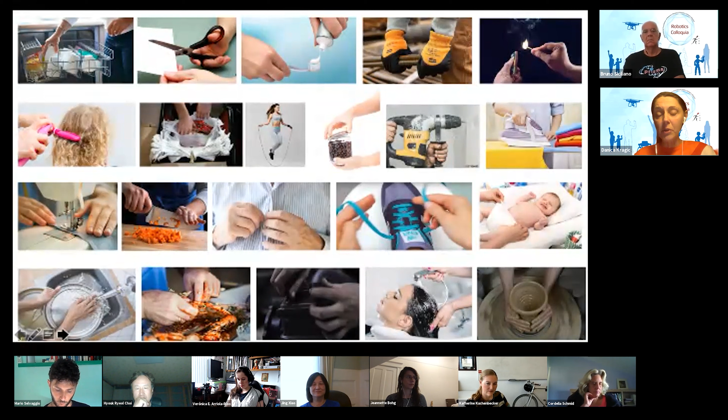We still don't have a good way of solving either the perceptual problems, the control problems, or the planning problems. I think images like this can serve as inspiration for very many different communities, not only robotics, for quite some time ahead. Now, when it comes to interaction tasks, I would say that the majority of human manipulation tasks are contact rich.

We get into contact with things, we lose contact, we actually use contact to exert compliant motion and so on. What is important when it comes to contact-free or contact-rich manipulations is that in the first case we potentially do not have any exchange of forces or energy, while in the second case we do.

When it comes to contact-free manipulation, we can probably do pretty direct kinematic planning, while contact-rich tasks do require dynamics to be taken appropriately into account. When it comes to the methodologies we use and develop for addressing these, they don't come only from the robotics community, but also from control communities, signal processing communities, machine learning, computer vision, and so on.

What I will focus on a little bit more today is why this is relevant for feedback control, and how data-driven methodologies that have been very much employed during the past decade, also in the robotics community, are potentially useful to solve some of the difficult problems of which examples I have shown on the previous slide.

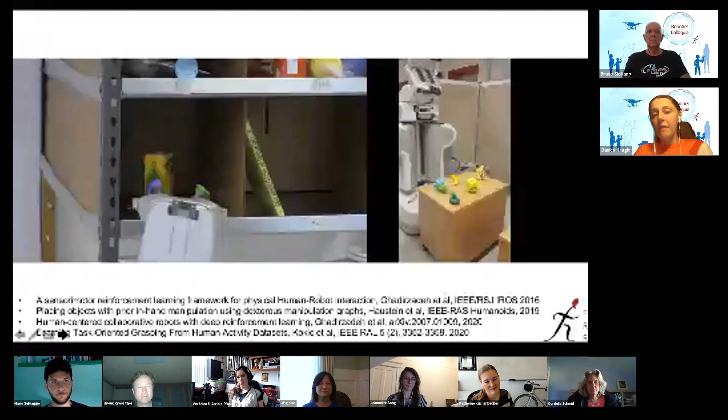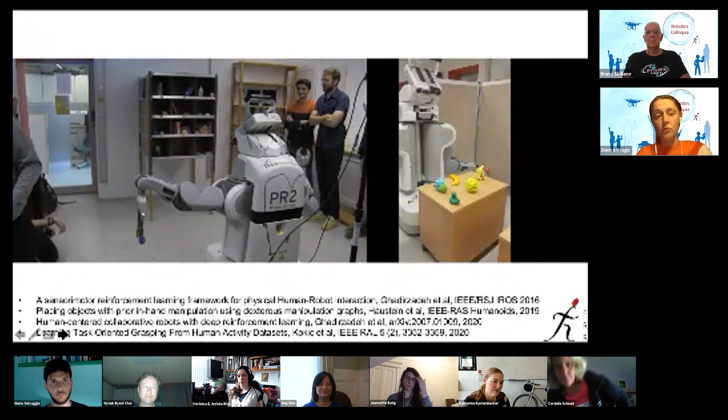Just to give a couple of examples, why do I show videos here? This is one example from the first Amazon picking challenge. Everything we do, we want to have a nice underlying theory with all the proofs needed for our controllers. We want perceptual algorithms that generalize and so on, but they also need to be effective. We need to be able to effectively execute tasks.

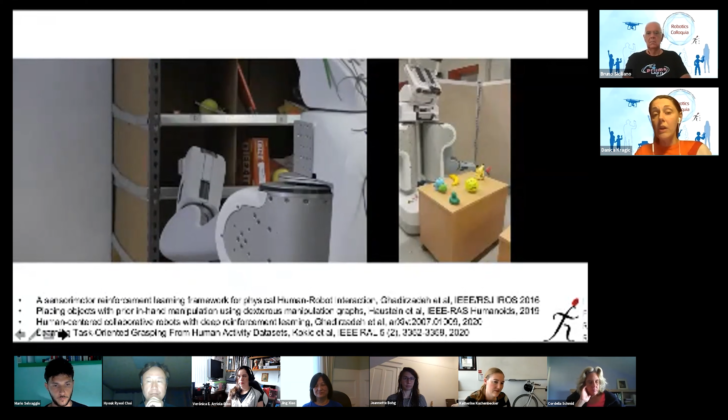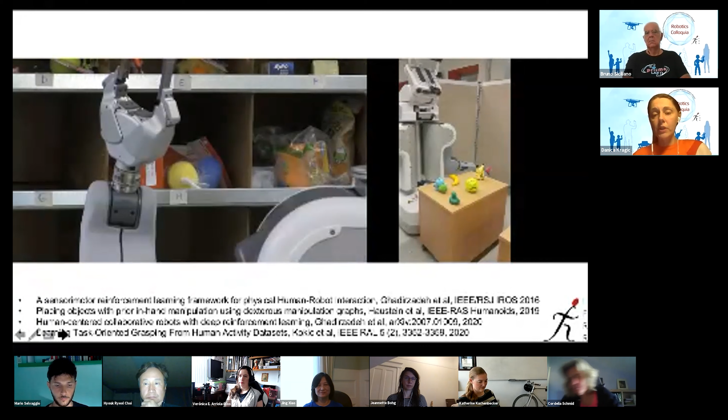Robots need to do this as fast as possible. They need to be able to adapt to changing environments, and if there are errors, they need to be able to replan their actions when errors are detected, so as to resolve them. The techniques we use rely on the integration of the strategies or approaches I presented on the previous slide.

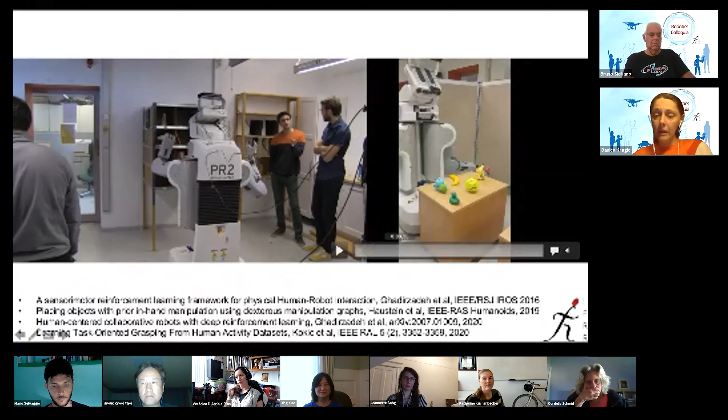Some of the tasks we would like robots to do might be too difficult to model analytically. So in order to understand how to throw a ball at an object here, which happens to be a Pokemon, this is a couple of years old work, we need to really understand the hand-eye coordination, the dynamics of throwing and so on. Having an analytic model for that may just not be feasible to design.

So machine learning strategies and ways of representational learning can be very effective when there is high complexity in the tasks we want to address.

Now I have been speaking a bit about multimodality, and I want to visualize it with one more example. When it comes to the robotics community and applications of robotics technologies for the future, there is a lot of promise in human-robot collaboration. Partially for the purpose of robots learning from humans, or robots even teaching humans how to do things, doing things together, leaving humans to do what they're good at, and then supporting, as a third hand, human activity in natural environments.

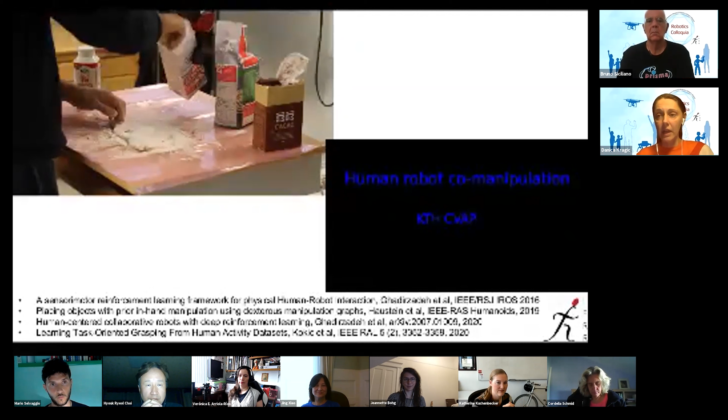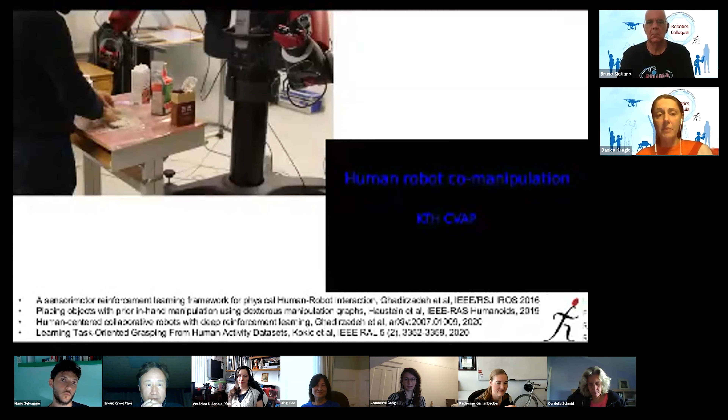In this particular case, observing a human baking is not all that easy. We still don't have good models of representing the state of something such as dough that changes a lot. And even relying on vision-based methods for hand tracking in cases where the hands are covered with flour or with this very deformable object is still very difficult to achieve.

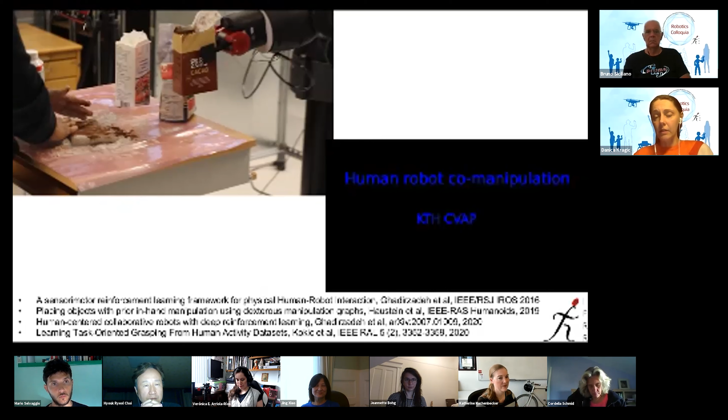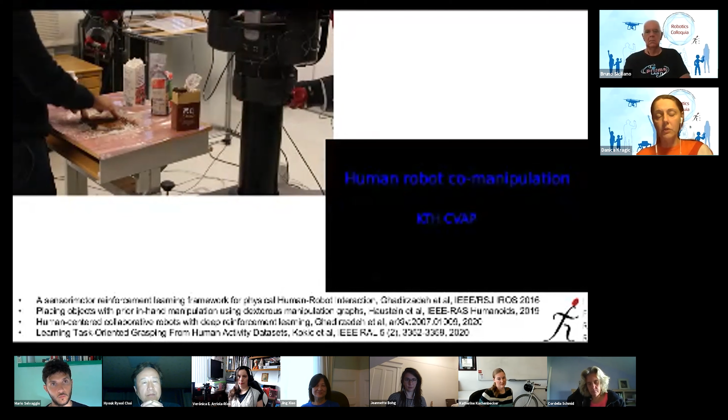Beyond just observing visually and passively helping, the robot wants to also engage in interaction with the human. So having a dialogue, explaining what the human is doing, what kind of help is needed, is something that would be needed in a scenario like this.

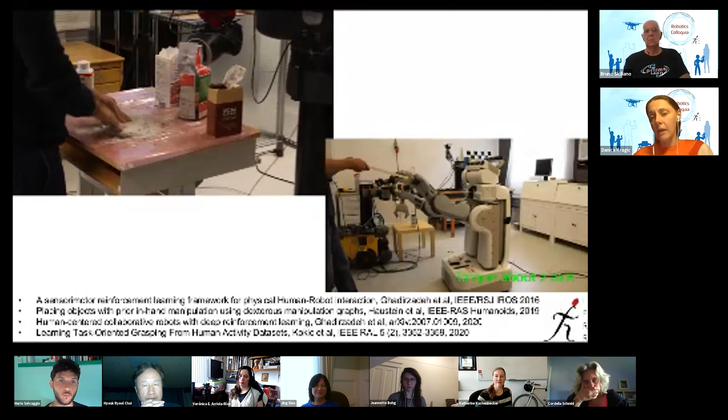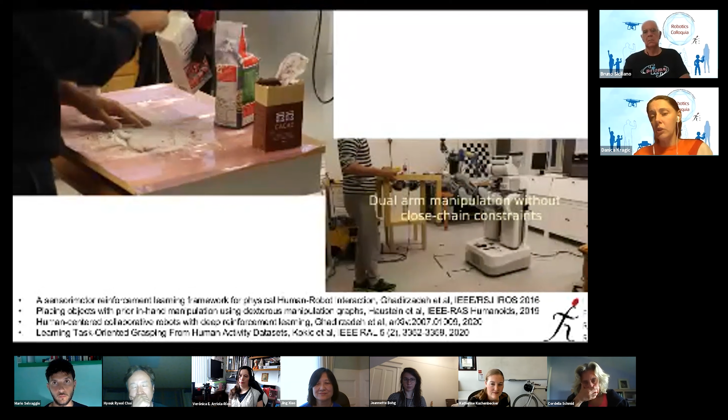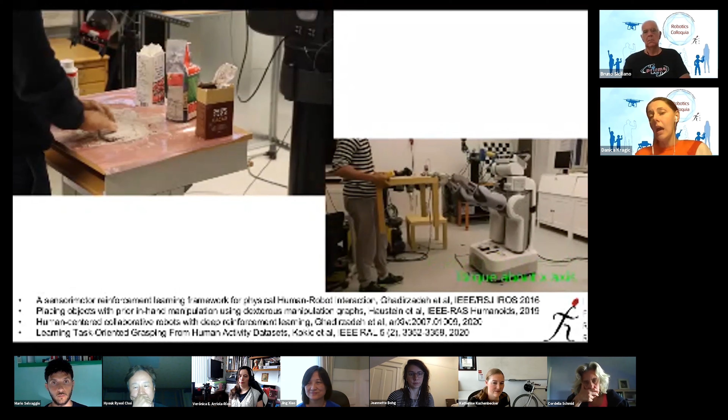Now, there are other types of collaborative tasks that are maybe more kinematic in nature, such as humans getting help from robots in carrying things around. For this to be done efficiently, the robot needs to understand something about the human body and its movement. It also needs to understand its own body, whether a certain activity brings the arms close to singularity, and address that properly without scaring the human with jerky motions.

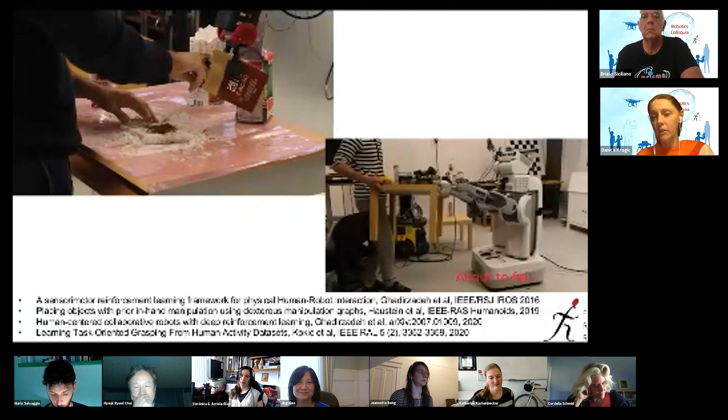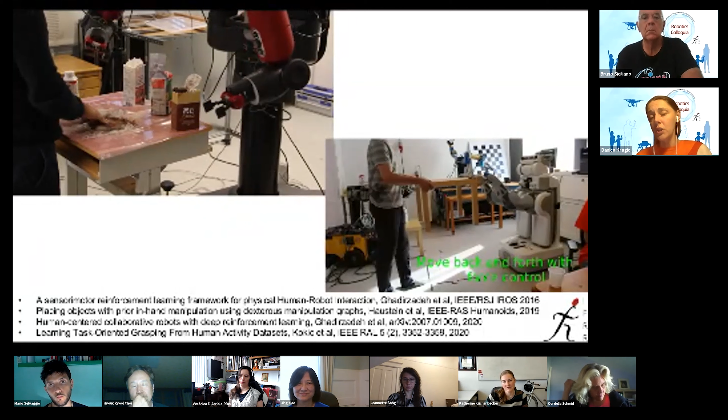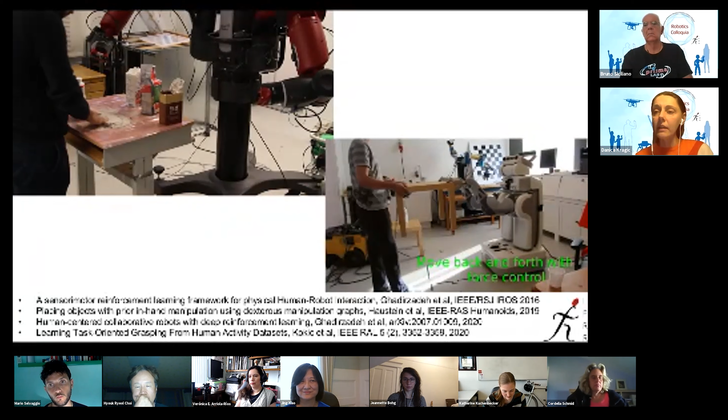I don't believe it's easy to solve these tasks only by relying on a single sensory stream. I think most of these tasks are extremely difficult to solve without also using conversation or dialogue. The robot, especially with an untrained user, will need to explain to the human what it is about to do, why it moves in a certain way, and somehow signal its planned behavior so the human doesn't get scared or generate some jerky motion that results in strange behavior from the robot.

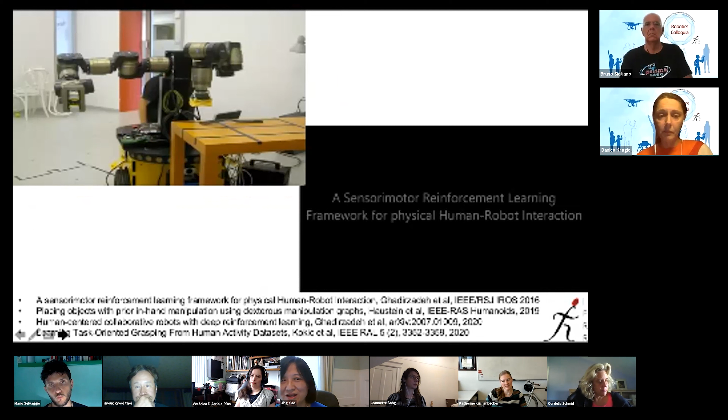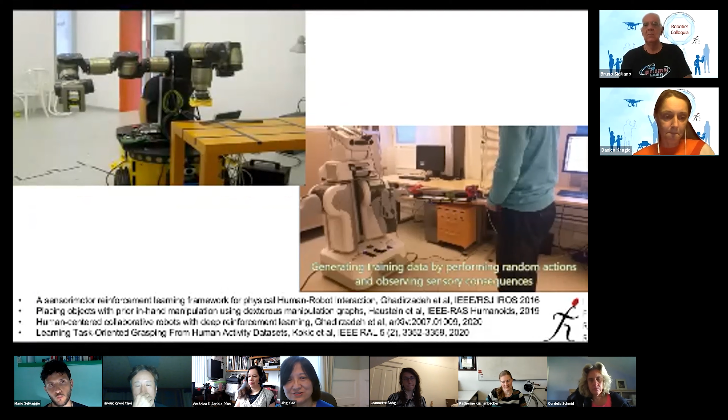Oh, hello, Danica. I'd just like to know a little bit more detail about this interaction. It's very interesting. How does the robot know what the person will need, what ingredients, and what kind of gesture or signal the person gives the robot?

It's not too obvious. Do you mean in the second example with the human-robot co-manipulation? I'm actually talking about this baking example. It looks very interesting.

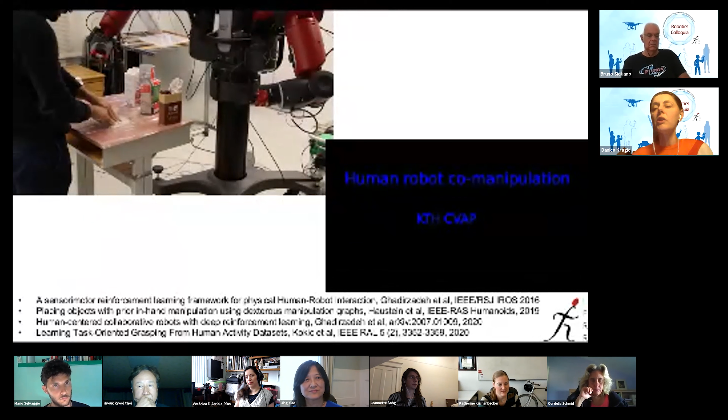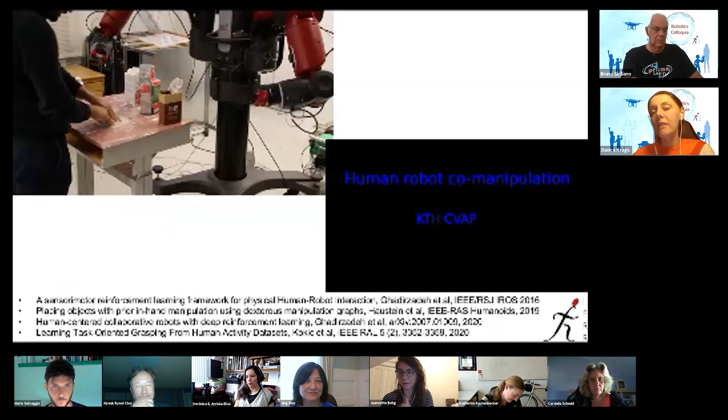This was just more from the purpose of motivating the problem. What we are looking into is a rather simple dialogue-based interaction, where the human follows a recipe. They have a task from a recipe, and the human starts with a set of activities or actions related to the ingredients in the recipe, and then asks, for example, okay, now I need sugar, now I need this, and so on. The robot can use that information to identify the right ingredient and give it to the human.

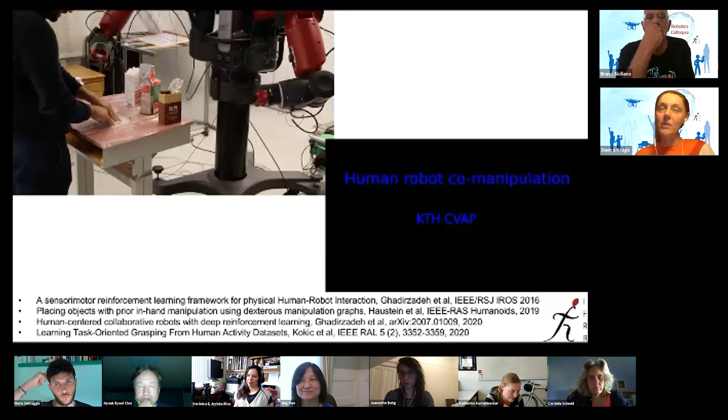This is just a motivating example, because the technical issue is how does the robot understand how to actually shake the box with sugar and shake the box with cocoa in order to provide the right amount of the ingredient. We thought, okay, it should have a small spoon and take things out and then measure, but it's too difficult. So the issue of shaking and getting the right relation between how much powder comes out and the shaking is an interesting dynamic problem in itself.

Very interesting manipulation, actually. Yeah. So thank you.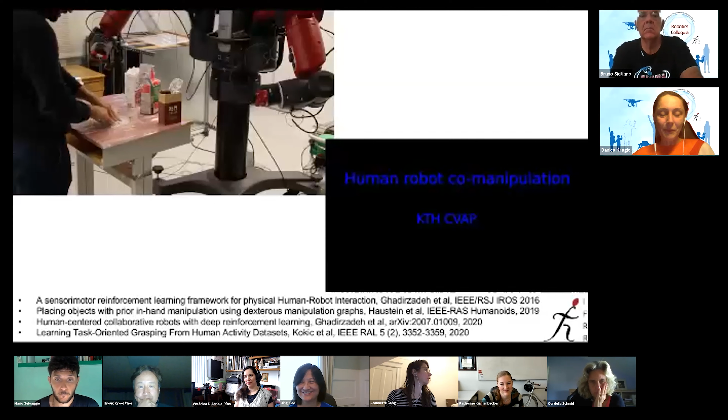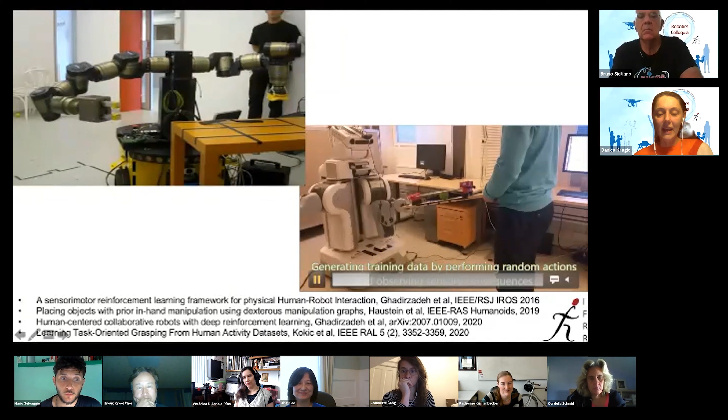Now, there are a couple of other things that I find interesting. The whole grasping area has been, not negatively perceived, but potentially considered as a resolved problem. I don't think that's actually the case, because when we interact with the environment, we don't just grasp things, we actually plan how to grasp them, and that plan is very much dependent on what the robot is supposed to do with the object.

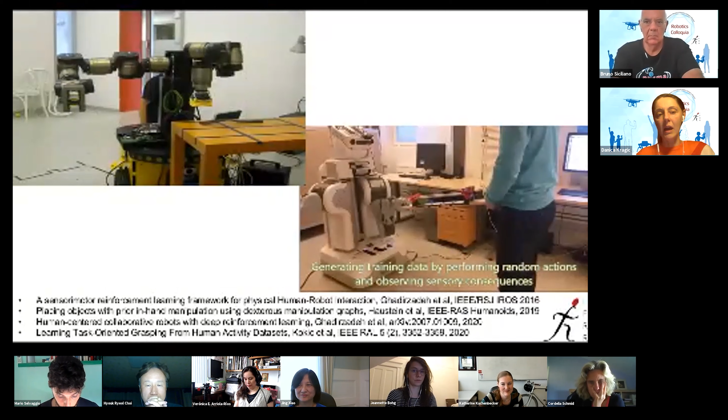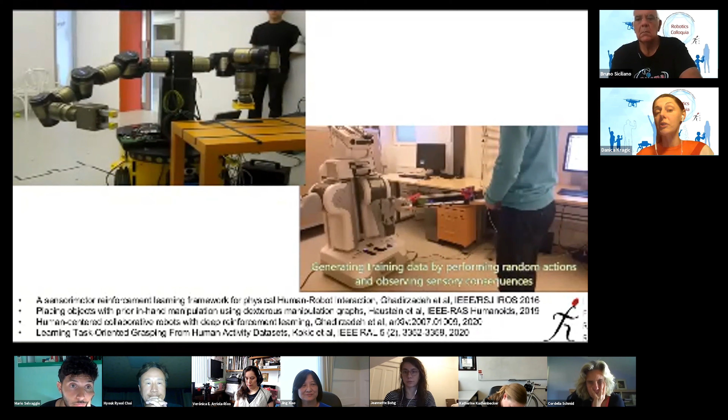So here I'm demonstrating, this is like a 10 year old video. We address the problem of pre-manipulation: how would the robot first plan how to reorient the object so as to be able to grasp something from a surface that is very flat. I think this type of planning is something humans do almost without mental effort, but we still don't have good credible strategies for all types of objects and tasks where robots can engage in that pre-manipulation effectively.

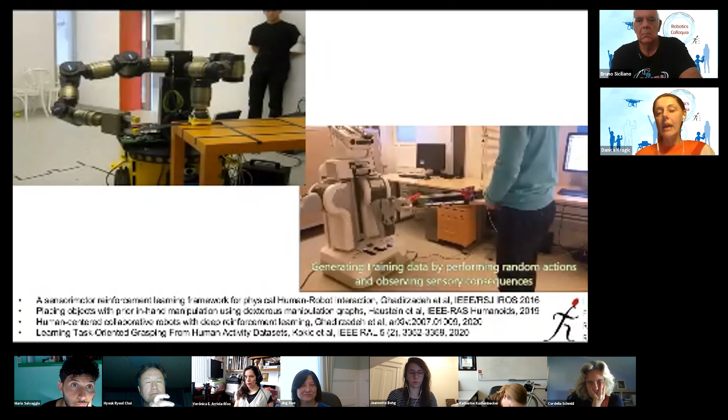And then finally, also looking into more human-robot collaboration, direct physical interaction, we looked very much into co-adaptation. This was a result of one of the EU projects we were engaged in. It looked into how much time one would need for the robot and the human to entrain themselves.

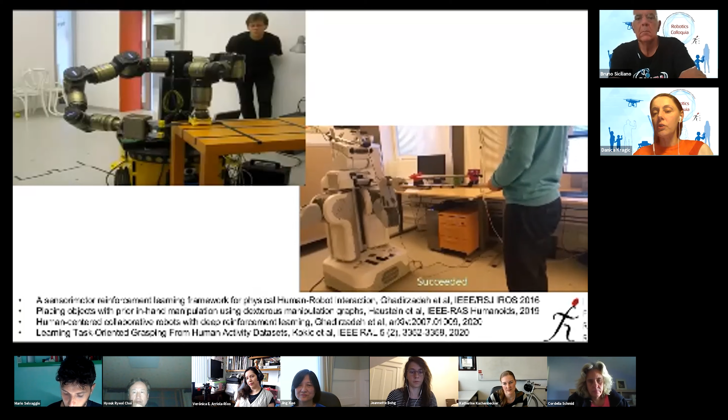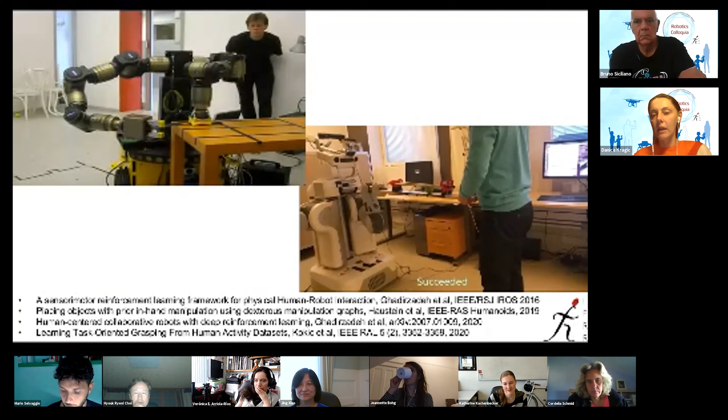So the task here is to move the ball, to have it at the end of the movement at the middle of the board. So the idea is that the robot and the human collaborate in order to achieve that task. They know what the goal is, but now they need to adapt the velocity and the movement to achieve that.

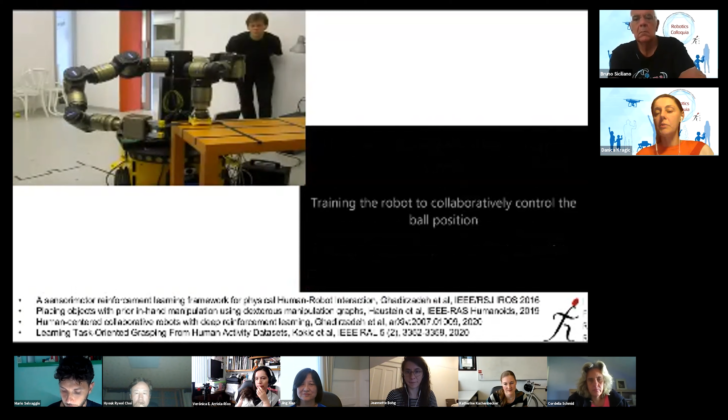I think that's also an interesting example, which we have many of, different types, where it's not only the human that acts as a master and defines what is to be done, but the robot needs to collaboratively also provide its own contribution, based on its own capability, it needs to commit to achieve a certain type of task.

Now I want to say a few words on hardware, because in most of these videos you have seen, well, not all of the platforms, but many of the platforms or generations of platforms that I have gone through. I have always tried to engage or use dual arm platforms, because I think that offers us more ability to address a large variety of tasks, and also platforms that are mobile. And Bruno has mentioned, yeah.

I will come to that when I give examples of chopping, hacking, or cutting tasks, because I think that's exactly what... thank you Darius, long time not seeing, I miss you. It's an excellent question, I think.

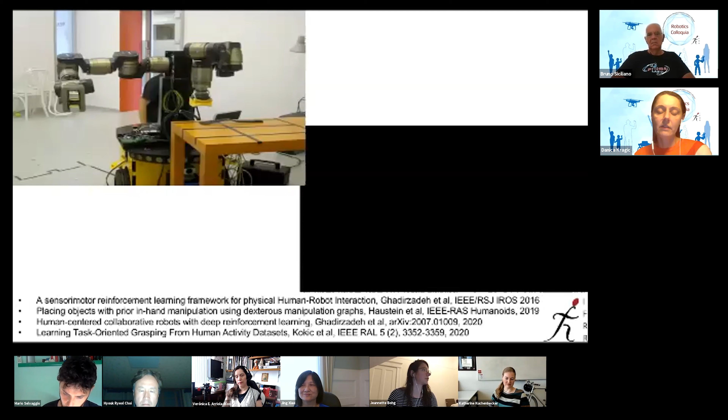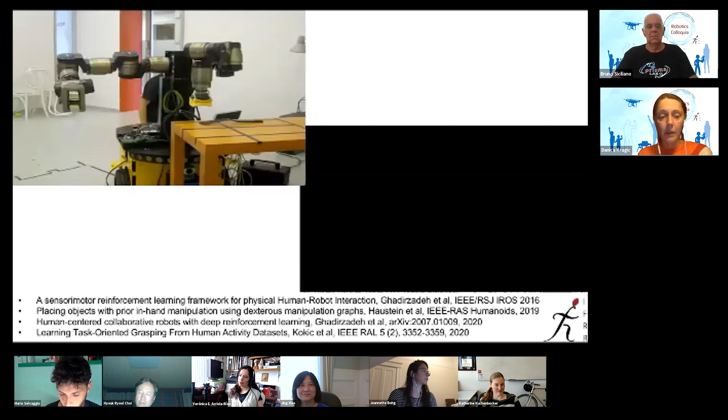Now, why am I mentioning this? 60 years, is it a long time? I don't know, so I'll try to make a joke and maybe nobody will laugh. But 60 years of Formula One.

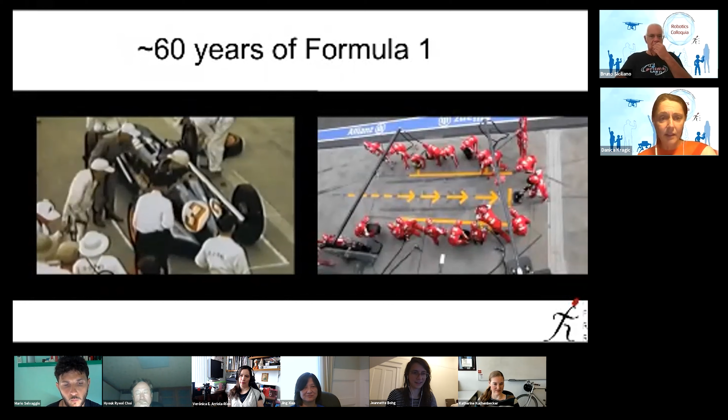1960s, last century. So this is an example of how it looked for a driver to go to a pit stop. You see there are a couple of gentlemen around, one of them doing some really heavy work there in the background, exchanging the wheel and so on. And yeah, it does take some time. The guy has also the time to get some coffee and so on.

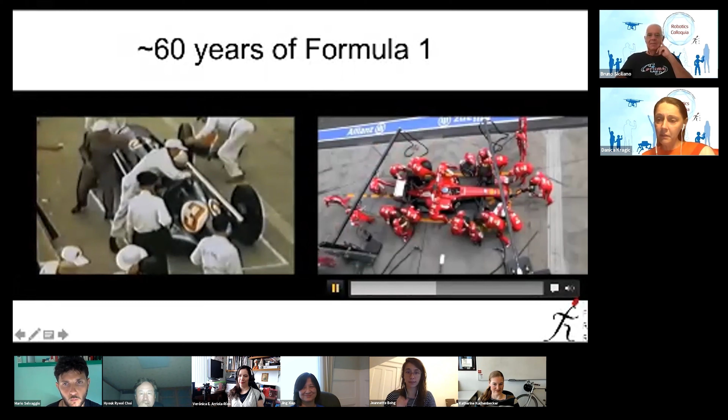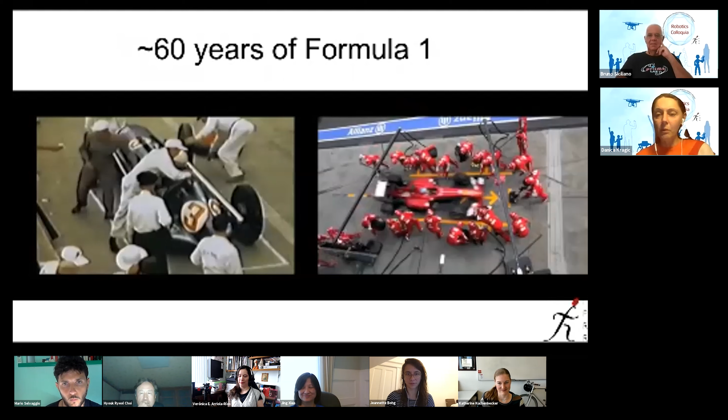And then look at us, how it looks nowadays. The car gets in and the car gets out and the job is done, right? So I feel that this is a little bit what happened to robotics, you know. We deal with good old problems. There is a little bit more people involved. Things happen a little bit faster. But not much has changed.

I'm not going to comment on the gender issue in this particular area here, but I think that it just shows that there are problems that in the beginnings of robotics, or even now, I think that we are underestimating both the effort that needs to be made, and also how that effort should be made in a more collective, more collaborative manner when it comes to researchers. Now, why is that?

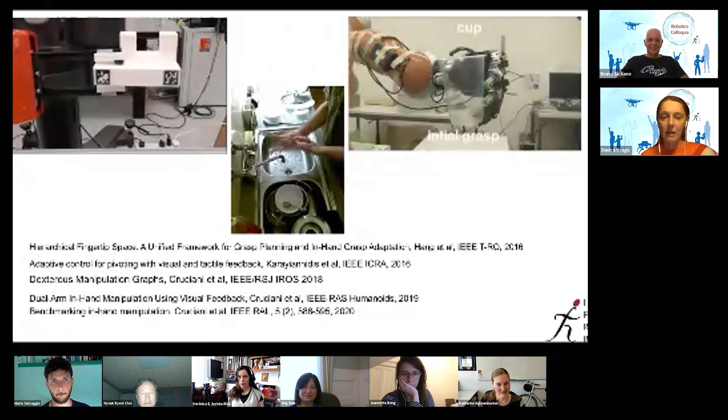I've been using this video, and I'm going to continue to do this for hopefully the next 10 years too. I'm not saying that I would like to have a robot that does this. Dishwashing, we have dishwashers, although my husband says that this is a task he cannot do. But anyway, I think it's a fantastic example of where grasping, interaction, dual arm manipulation comes into play.

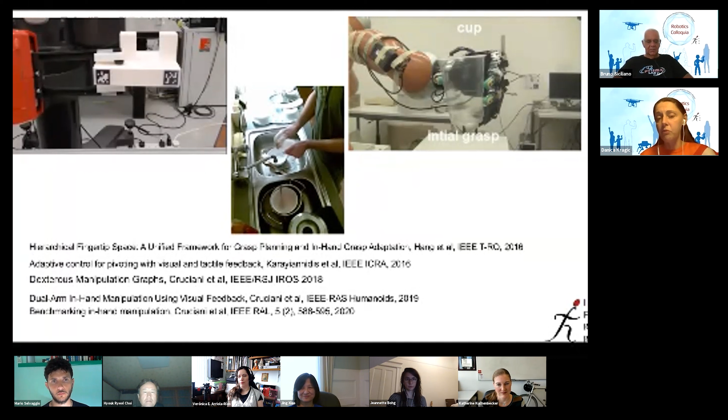So the human here uses hands as a tool. It manipulates another tool, this sponge, right? He is able to adapt the forces and the torques to the friction conditions that also change, right? If we have oil on porcelain or on metal or on plastic.

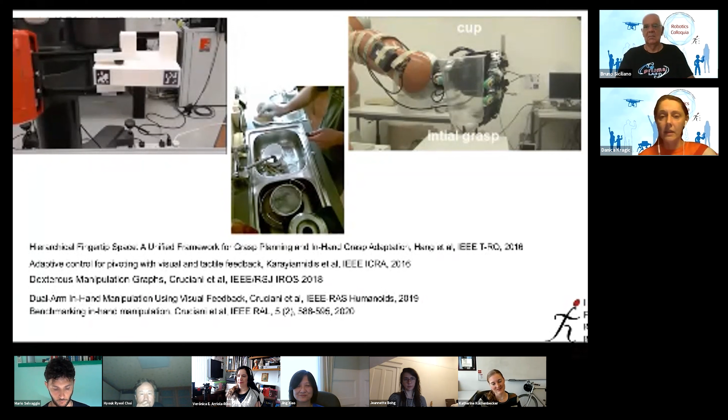And of course, I talked a little bit about this emotional aspect in interaction tasks. If you have something that is pretty expensive in your hand, like a very expensive porcelain bowl, you will probably not put it in the dishwasher. You will wash it by hand, and you will do it very carefully. So this, or if you have a dangerous object in your hand and so on.

So all this knowledge here is something that is somehow trained, or innate to humans. Well, not maybe innate, but definitely trained. That is still very difficult for robots to do, especially when it comes to interaction in different media, which also most of the robots won't be able to do in water, oil, and so on.

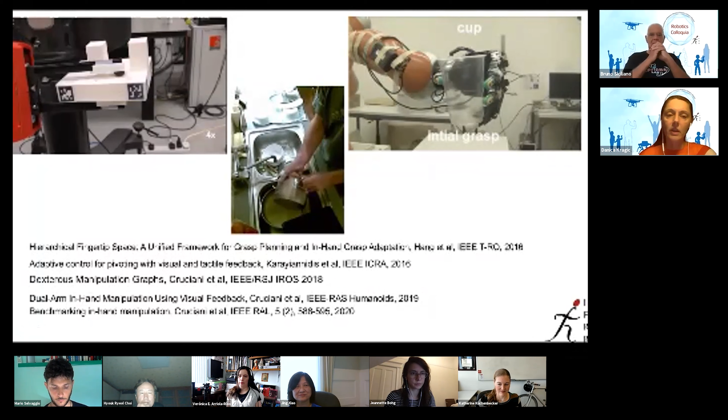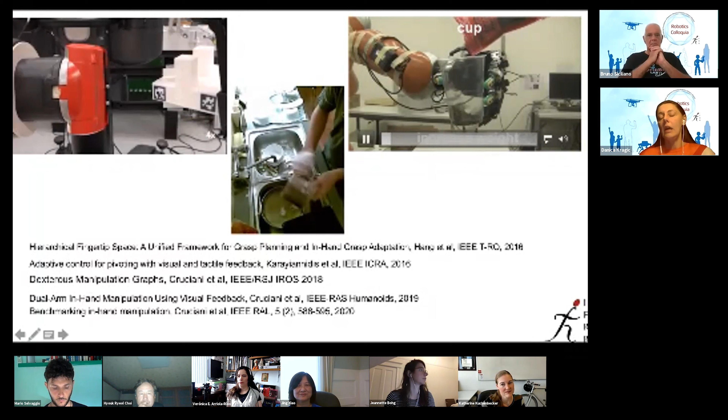Now, what can we do when it comes to in-hand manipulation? Yeah, there have been examples of actually moving, reorienting objects, and also work that can adapt to both changing properties of the object and external forces, doing regrasping, squeezing harder, addressing the issue of pivoting or regrasping.

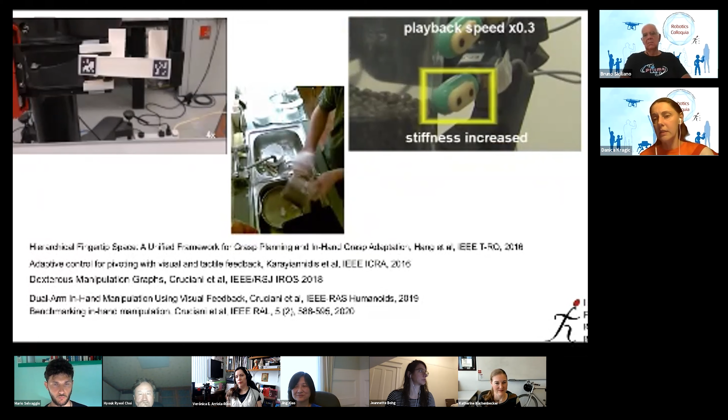I think that all of that is interesting, but as most of you know, especially those working on grasping, this requires quite some time to set up the system, to get the necessary, in this case, tactile feedback to understand how much force I can actually exert on this object until it breaks.

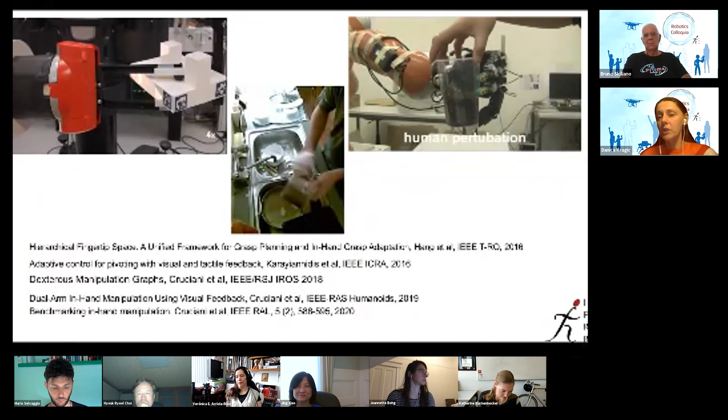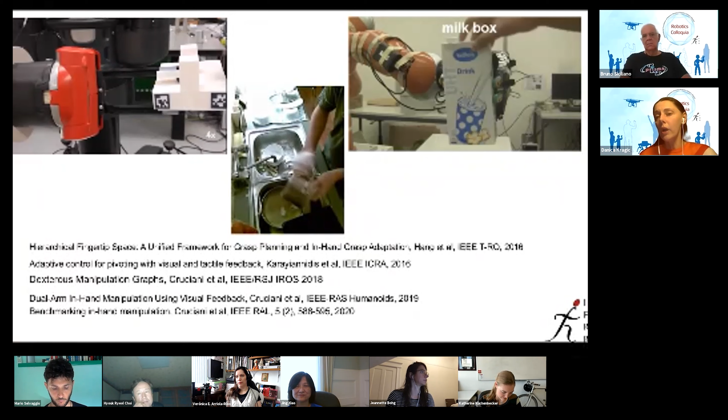And where just exerting more force is not enough, but that actually I need to grasp it in a different way in order not to lose the object from the hand. Or if the external forces or the weight is too high, I would also need a second arm or a second hand to act as a support.

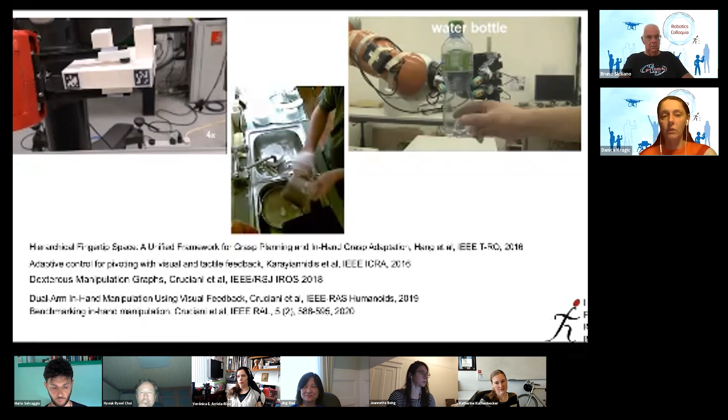And all of those interesting problems, I think we still need to find a good way of how to solve and generalize over different platforms and over different types of objects.

Now, that's why I think that all of the problems that we see, maybe as grasping, caging, in-hand manipulation, and so on, they need to be put into context of an integrated system.

So we need to understand how to actually pre-grasp something in order to be able to maximize the way of re-grasping or caging the object once the external forces start to act on that. And once it has been grasped, also have the ability to then do online control. It goes a little bit into the direction of what Darius has asked.

Many of the properties of the objects will not be known, maybe prior to actually doing post-grasping. We will need to understand something about the friction, weight, and so on. So that needs to be estimated, and reused, let's say, in the control strategies.

If we don't have the appropriate sensing, so if our tactile sensors cannot sense shear forces, it is of course necessary to use other types of sensors, such as vision, in order to understand whether slippage has occurred, and be able to have systems that choose the appropriate feedback to fulfill a task or just keep the object stable in the hand.

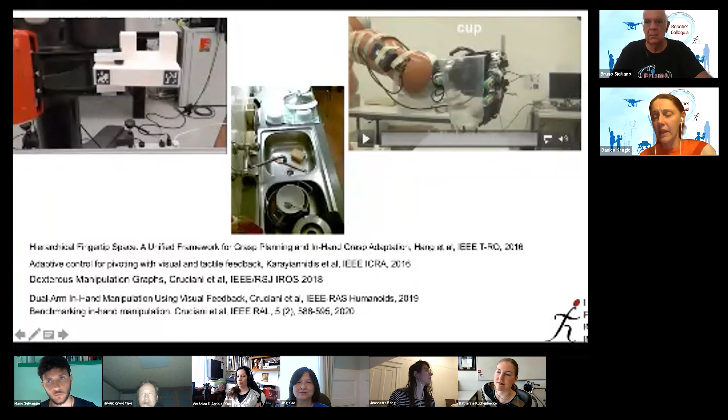No, so everything is with feedback. In this particular example, the work we did with Aude Billard's group, which is on in-hand adaptation, used the SynTouch sensors to actually measure the forces and also the vibrations, and uses that to basically do stiffness-based control. We also use a force-torque sensor in the wrist to understand the external forces acting on the cup. In this particular case, fiducial marks are here, but we are actually using visual feedback to understand the pose of the object in the hand in order to be able to plan the reorientation. So in these examples, everything is based on single or multiple sensory feedback.

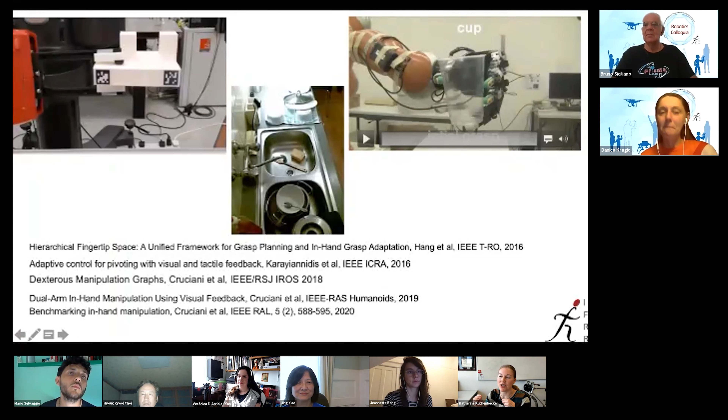Dani, great, can I ask a follow-up question? This is Katherine. Let's go to the picture on the right here. I liked the contrast you were making between the SynTouch BioTac, these biomimetic fingertip sensors, and the force-torque sensor. I find that my students, the force-torque sensor makes a lot more sense to them — they know the units, you can draw a vector, you can really make sense of it. The BioTac signals, even though you said it's not a force sensor, it's impedances through the fluid, these tactile sensors, it's complex. What's your opinion? Do we need both of these kinds of sensors? Does it really matter if the sensors are interpretable from an engineering standpoint? Do we need multiple modalities?

I'm kind of of a belief that we should try everything and then have good ways of assessing how relevant it is for various types of tasks. When it comes to slippage, for example, I think it's extremely difficult to detect with solely a force-torque sensor, or when you do things and interact — for example, we have a couple of examples of using tools, mixing things in a bowl or something like that. For tasks like that, a force-torque sensor might be okay, but everything that has to do with reorienting things in the hand, or potentially applying forces actively, like in this particular case where we squeeze and look into the stiffness to understand how much — there's an upper bound of how much we want to squeeze in order not to destroy this plastic mug — for all of those things, I think we need the fingertip sensing.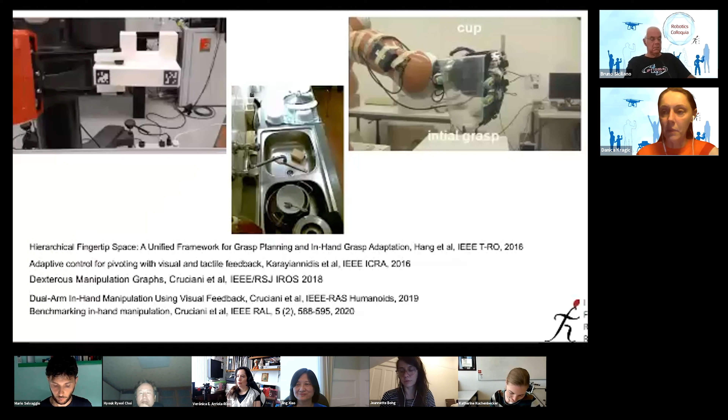Now, from the machine learning point of view, I think it would be interesting to look into disentanglement as a scientific problem—to understand, out of all these measurements, are these representative for the task? How are they representative? Can I use them as generators for control and so on? I think we should encourage everybody to use as many sensors as possible, but really try to choose something the whole community can use robustly, so we don't have all these tedious processes of calibration. Thanks.

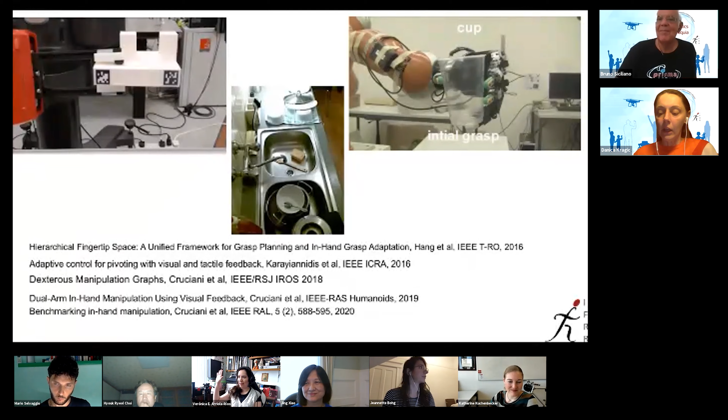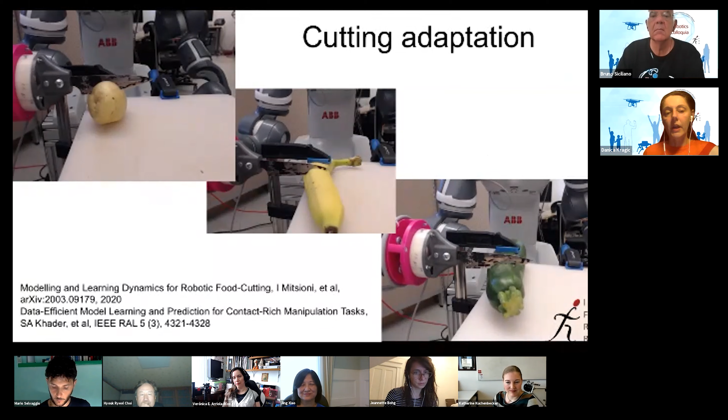Okay, I'll continue, but please stop me anytime. Some of the recent stuff we tried is adaptation in cutting. I wanted to go back to what Darius asked—and this is extremely difficult. It's not only that model predictive control or open loop strategies don't work because not all potatoes are the same, not all bananas are the same, not all squashes or zucchini are the same. It's not only that—the potato is actually not uniform in terms of stiffness or hardness along its whole body, if I can say that. So these are some representative tasks that are extremely difficult to do.

Now, again, you see another robot we are now using for this type of task—it's ABB Yumi. For this purpose, in order to exert forces needed to cut really hard stuff, such as potatoes that have lots of sugar, which makes the knife stop moving, or carrots, the robot couldn't actually exert the forces we needed. So I think this is also an interesting problem that one needs to address.

Maybe the robots won't cut in the same way as humans. Maybe we need to choose different types of cutting strategies, so the second hand is not just steady holding the object, but rolling the object while the hand is cutting. So there are many interesting things still to address here, and that goes a little into the direction of what you, Katherine, have just said—it's not so much about doing things the same way as humans do, but trying to understand what are the plausible strategies we can actually have on robots.

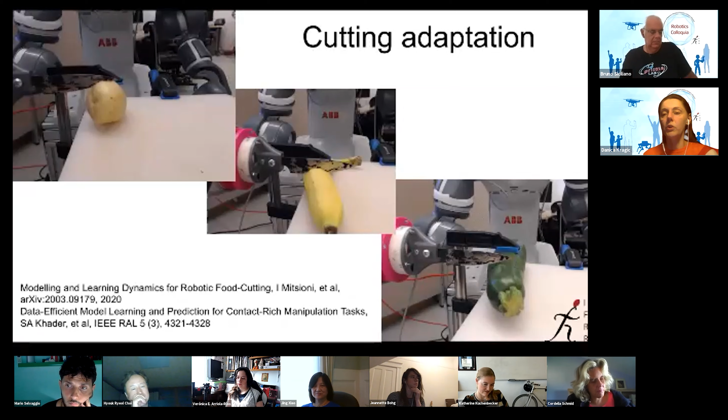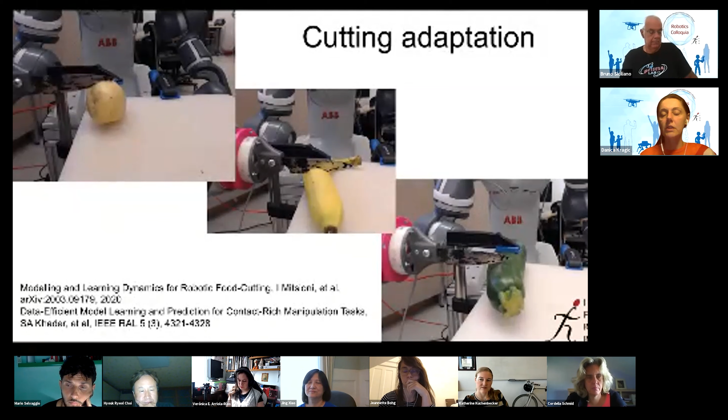If you think about fruits that have hard parts inside, that changes things. So one can be very creative about the structure you try to cut through, and look into how you can adapt your controllers, maybe learned on a similar type of object, while you're cutting. It's not so much about the task - we really want to understand how the physical properties affect the choice of models we are using. Hopefully that addresses it; I'll come back to this when I talk about interpretability later on.

I think this also goes a little into the direction of what Jeannette just asked. Yes, we need to think of problems that are task relevant but also generalize over various types of tasks, because we cannot assume the robot will always have the experience of having interacted with exactly the same type of object, fruit of the same size, and so on before.

We also want to do these things embodiment independent. So again, in the direction of Jeannette, if I learn how to do this on a velocity-driven robot, we should be able to transfer that to a torque-controlled robot or vice versa. We should be able to do this between Yumi, Baxter, PR2, Franka, and other robots. So what I'm looking at is how we can build embodiment independent controllers that are able to do that.

In the direction of Cordelia's question, it would be nice to show that a robot that has force torque sensors, tactile sensors, and visual sensors can deploy all this data, but has such a representation that it knows which measurements to use when. It should identify where it is in the process and use the right type of measurements to resolve the problem or execute the task. This has a bit to do with disentanglement, but we need to really understand the physical properties of things to be able to do that.

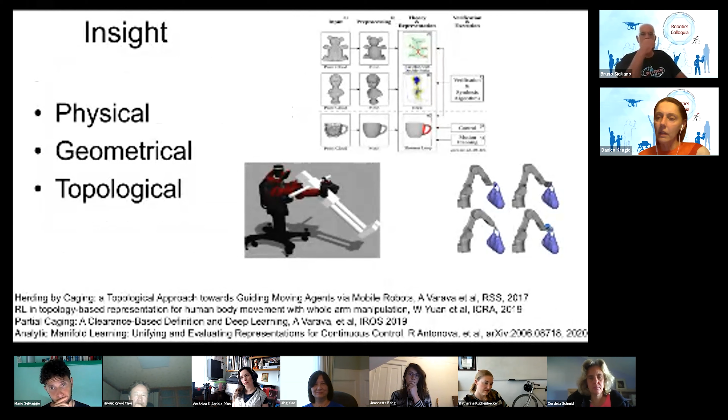When it comes to the properties that everybody has mentioned, these are some physical or geometrical properties of the objects, but there are also representations that can be topological in nature, and these can be very much relevant for different tasks. So grasping things or caging things, it can be about hooking things, helping humans come out of the water. It's not really about grasping, it might be more about caging, making sure we have the interaction or linkage between structures.

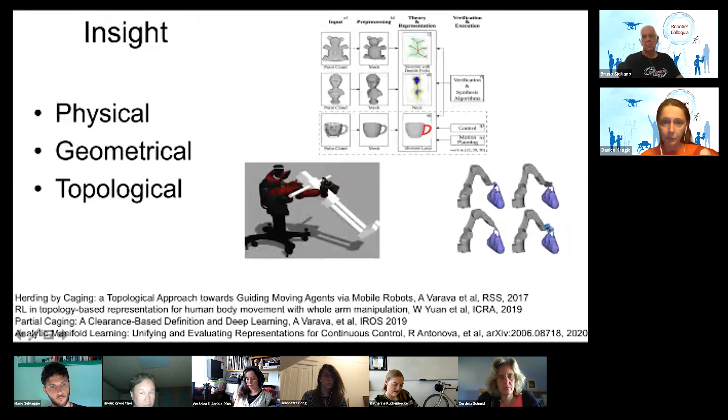These are some of the problems we looked into, how that can be used for controlling full body motion of not really a humanoid robot, but a full body robot, and also for interactions with objects that have loops, for example. I wanted to show a couple of examples where the geometry plays a role.

This is now 7-8-year-old work where we tried to look into geometrical representation of grasps and shapes. Are there parametric representations that allow us to have a space of grasps and shapes in which we can transfer stable grasps? If I know how to grasp a book with a 3-fingered grasp, you see the normals here, that's one stable grasp that can be applied.

How can I, by having a relevant continuous representation, move in this representation space as the shape changes in some parametric way, and the 3 stable grasps with 3 fingers remain? I think this is very interesting.

Of course it opens for development in many different ways. It's not taking into account the embodiment, whether these 3 grasps can be achieved by any of the available hands, but this is something we could address now with more data-driven methods, trying to look into how the kinematics of a hand should look in order to continuously grasp this set of shapes.

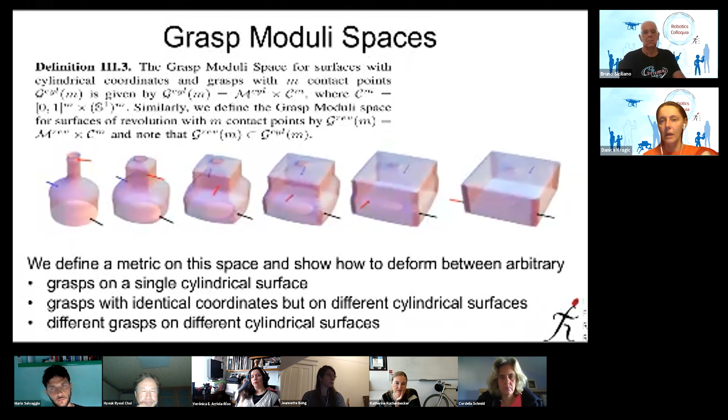I know I'm out of time, but I want to say a little bit about revisiting task-based grasping with CNNs and Bayesian optimization. We did that recently to understand how to actually learn task-based grasping from very few trials. We also look into how we can use various types of priors and regularizers to understand tasks such as pushing.

For example, in this case, again with Yumi, we change the friction on which the box is pushed, and we change the friction of the box. We tape various types of materials on one side, and the robot needs to adapt how to push something where the friction condition changes without tipping the box. It needs to identify that conditions have changed and, in a more reinforcement learning-like framework, adapt the way it pushes in order to do the pushing again without tipping.

Let me skip that. One more way of thinking of efficient representation is by using a cascaded network of encoders and decoders. Here we wanted to learn pretty dynamic tasks of throwing and some picking and grasping in very few trials.

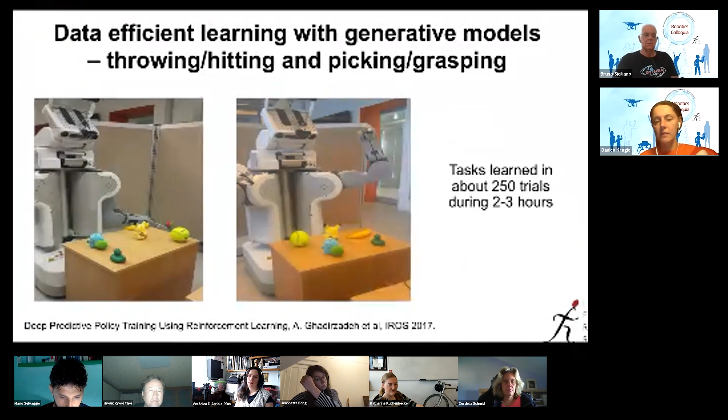So what we did, we went from high resolution images to a full trajectory of robot motion, to throw something at a particular object in the scene. Here it's basically encoding a representation between an input image and the full motor trajectory. It's 7 joints, in 20 time frames, so you understand how many trials we would need to train this space.

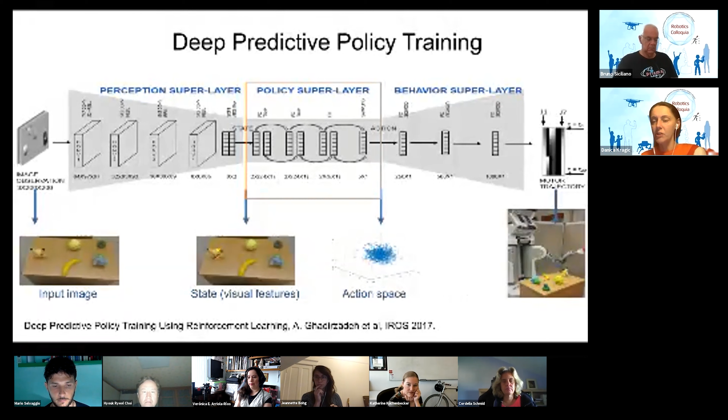We did this using an appropriate encoder-decoder network, it's in the paper for those interested. We did lots of open loop, or blinded, movements in the simulator to provide suitable movement strategies for a robot, in this case PR2. So we can train lots of movements or trajectories in the simulator, and these need to be adapted to the available visual feedback.

The things we are doing currently involve visual action planning. Again, we look into folding, but folding of objects that maybe are still simple, but not just a handkerchief or a towel - we look into t-shirts. How can we generate visual plans, visual action plans for a robot? Let me just go to a video, I think it will be a little bit easier from that.

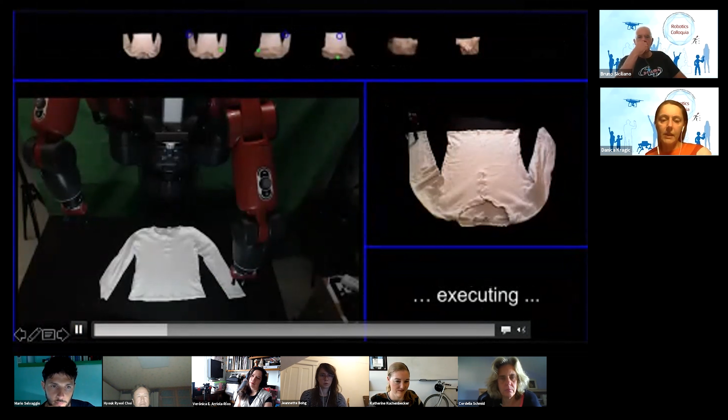It's about looking into latent state representation for doing planning of actions of a robot that needs to fold the thing. It doesn't fold it very nicely, but it can find a suitable representation of how to go from a start state to an end state, by generating a set of trajectories of picking up a sleeve, putting it down, and so on, analyzing which set of states are reachable from the current state and which are not.

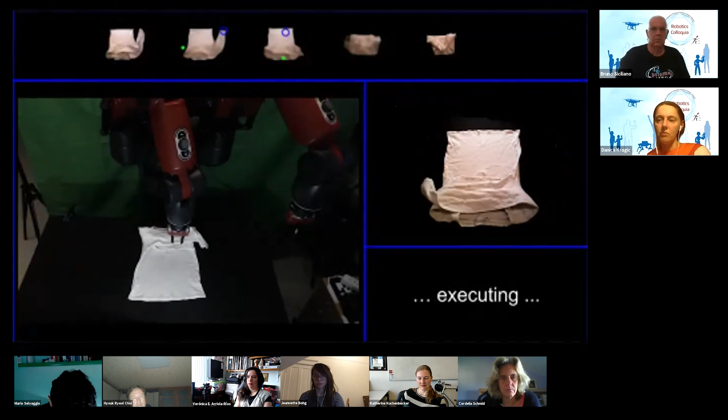This is also pretty high dimensional, because we do it for very many objects and for very many different tasks. One other example is stacking objects. It relies on variational autoencoders for the representation, as a generative model, and latent space representation, to address the high dimensional visual feedback in an appropriate manner.

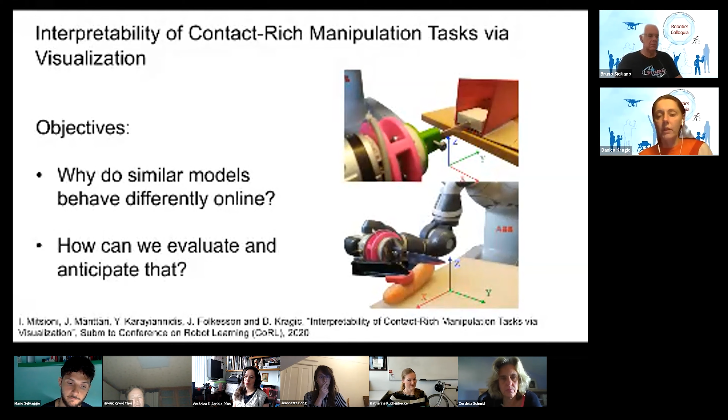Very shortly, what's next, or what we are currently working on, what I think is interesting. I talked a little about interpretability - I really want to understand when we deploy certain controllers, when problems occur, why they occur, how we can address them, can we visualize this. This goes into what Cordelia asked: how can we explain what is happening during a force-based control task, or appropriately assess various types of controllers based on more data-driven methods. So we build kinodynamic images that encode the positions, forces, and controls.

We are borrowing very much from the computer vision community, which looks into explainability - what in the network is representative of a cat or a dog. Looking into heat maps, really trying to understand what caused a certain action, such as, for example, that the knife got stuck - what kind of measurement brought it to that. So can I use this as a predictor?

We are also working very much on the meta learning part, for understanding various types of kinematic structures, in this case robots, to be able to transfer learned actions from one robot to another, because they have different properties. This is exactly what I said in the beginning - it would be interesting to see to what extent any kinematic structure can learn something from another kinematic structure, and how we can do this in a data efficient manner.